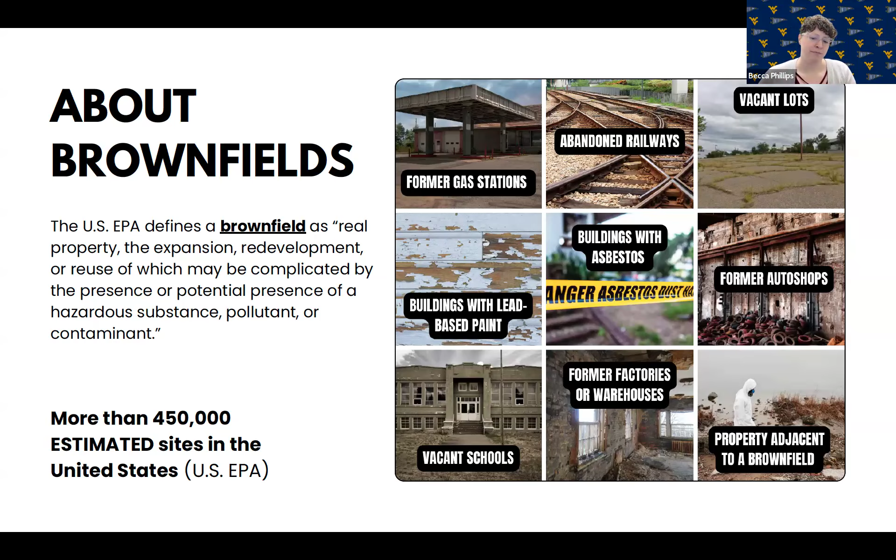Before getting into that, just a quick refresher on what a brownfield actually is. There's a formal definition by the EPA, but basically it's any property that might be contaminated based on previous use. Some common examples are things like former gas stations, abandoned railways, anything that has asbestos or lead-based paint. These aren't so contaminated that it'd be impossible to clean them up and reuse them, but they definitely do need to be looked at and made sure that's been addressed so they don't pose a public health issue.

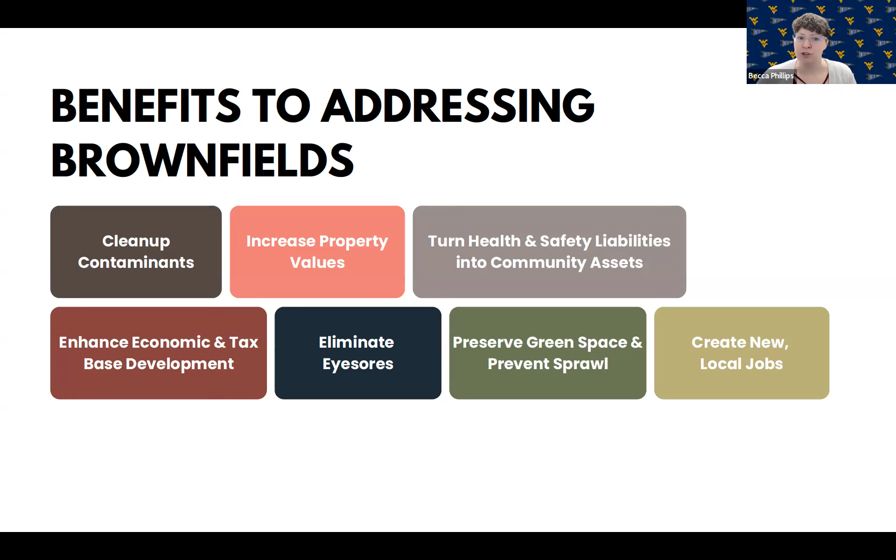When we're thinking about river towns, something important to be aware of, especially in this area, is the earlier history when industrialization was starting to take place, and a lot of those sites did occur on the riverfront for a few different reasons. It's largely economical and related to infrastructure, but it was an easy way to transport supplies, especially some of those heavier supplies before the railroads were installed.

Also, being close to the water was helpful for manufacturing and even for sourcing some of that power, like for steam engines and whatnot. And then, of course, historically, that was a great way to just conveniently dispose of your waste and just toss it in the river, which we know now is not a good practice.

So over the years, some of these sites have become abandoned and vacant as the factories have closed, and not only being an eyesore, they were also underutilized spaces and potentially public health hazards because there's a safety hazard and contaminants that can affect public health.

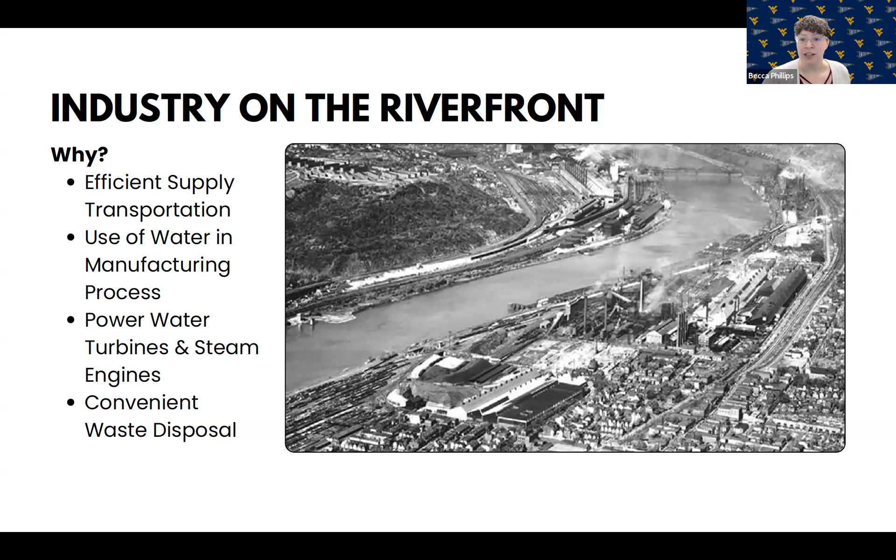And so a lot of what's happening now is some communities are starting to get these sites redeveloped, and a lot of those reuse options more recently are trending towards outdoor recreation and getting into the tourism aspect of things. This has been this gross industrial thing - what can we make it that really takes advantage of the beautiful river, getting some of that area cleaned up so that we can actually enjoy it for us as a community, and not just looking at it as a way to make money.

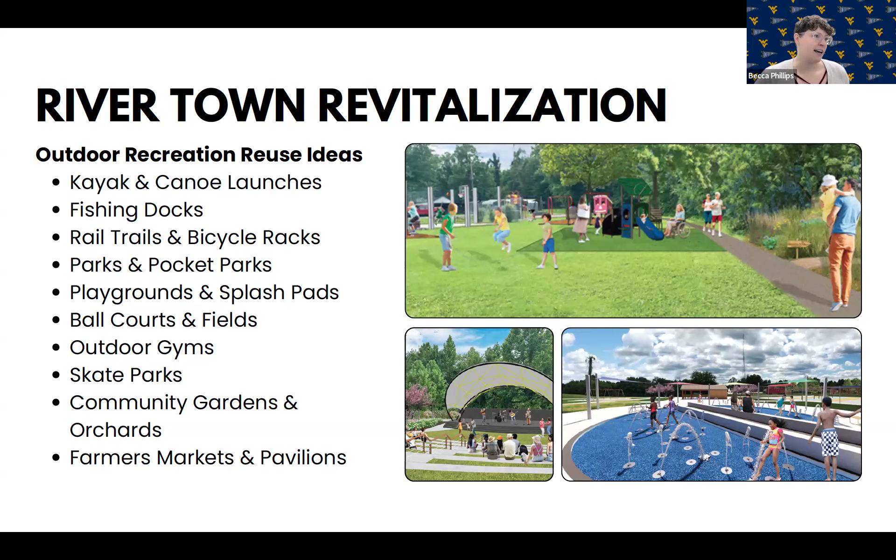Speaking of some recreational reuse ideas, there are all kinds of different ways that, depending on how the site was used in the past and where the contamination is, it can be remediated and put to a different use. A lot of fun different options here that I'm not going to list out for you.

What I am going to do is go through two different examples of some things that have taken place in West Virginia that the Brownfields Assistance Center here in the Water Research Institute has actually been able to help out with and have a hand in.

So let's get into the Morgantown Quality Glass Plant. This site is located on the Van Voorhis section of Mon County, bordering the Caperton Rail Trail. The site was about 3 acres, and at the time that we started getting involved in the early 2000s, it had 5 abandoned building structures that were full of some different hazardous things and waste materials.

There's like yucky bucket there, which is actually what the file picture is called.

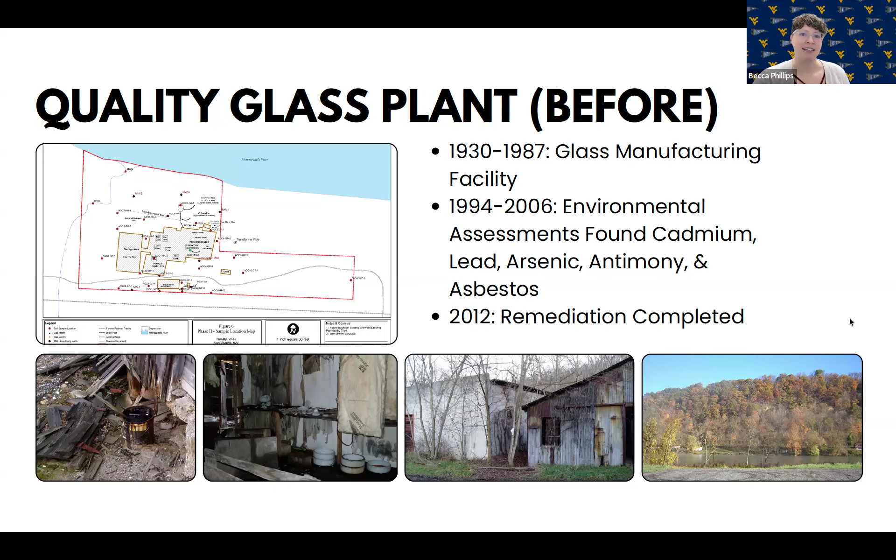All right. So now we're going to move on to the Fairmont Box Factory. And this one started as a glass melt shop and recycling facility, which then continued to just be a cardboard box manufacturing facility. And a lot of assessments happened over the years because the community could see this as an eyesore. It's also right by the river. So it's like, this is a great location. Can we please get this dilapidated building addressed so that we can use it for something else?

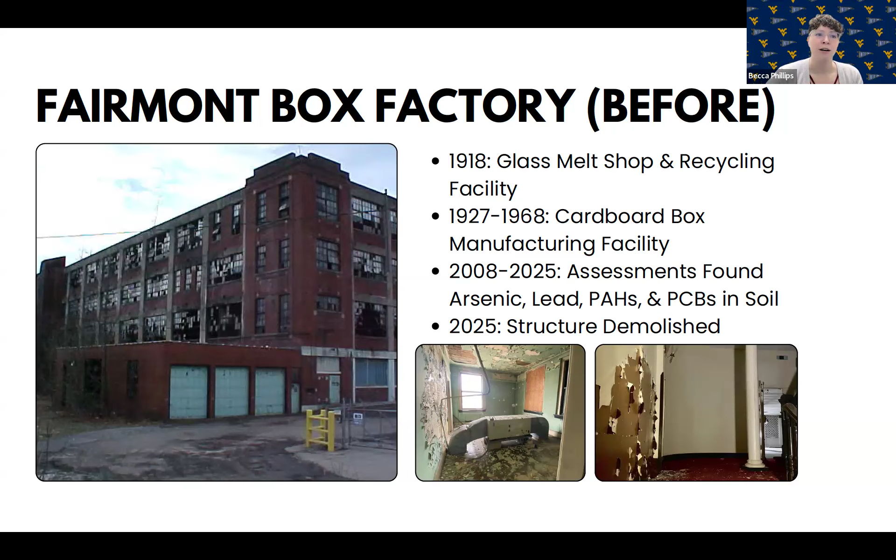And, excuse me, the city has worked with the community over the years to get input and feedback on what these sites should become. And it's really interesting to look back historically and see how some of that has changed. And the most recent plans are to really turn this into more recreational use for the community, which is great for public health and also helps with tourism too.

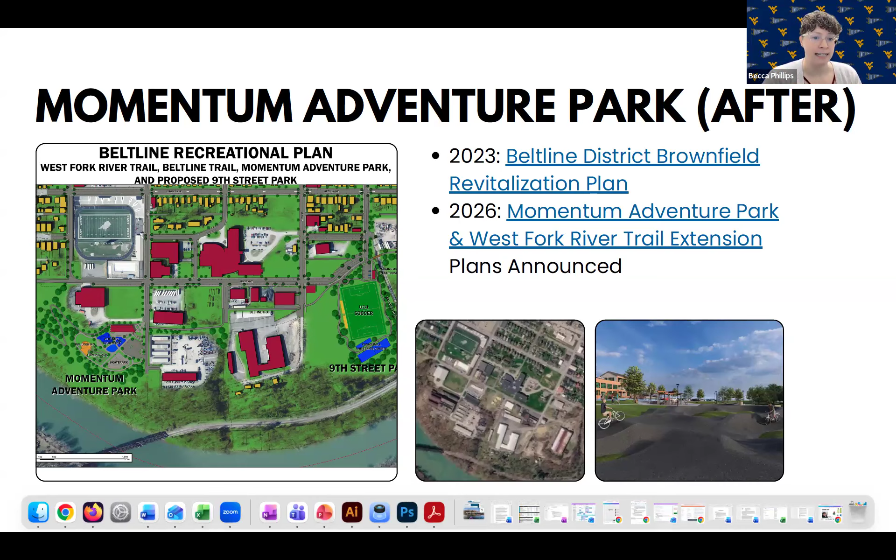So some of the services that we help provide for the area in general include some mini grants that helped with planning and visioning and securing additional funding. We also assisted with Fairmont applying for 3 different assessment grants, and then we helped with community engagement in general.

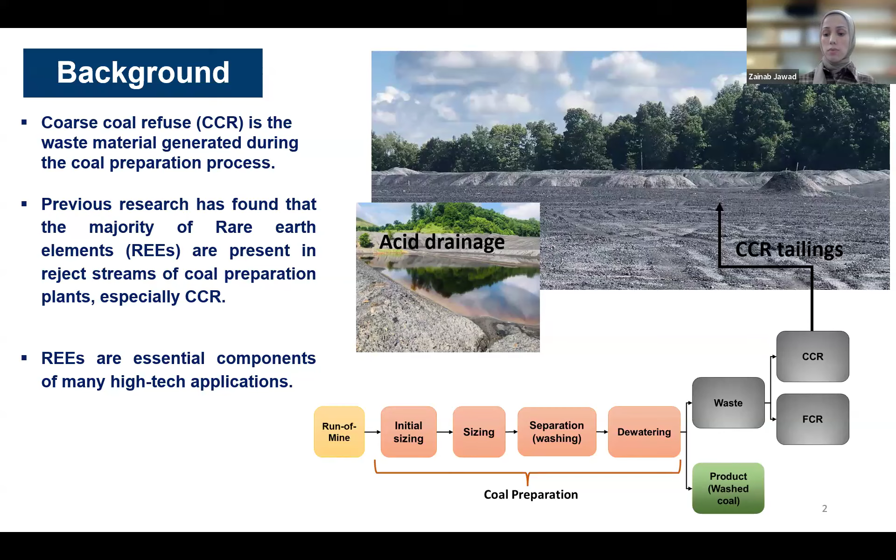Those materials are usually dumped or stacked as piles in open areas within the mine. And once exposed to weathering conditions such as oxygen and water through rain, its pyritic shale oxidizes and it generates acid drainage. So the hypothesis this project was built on is that the process of pyrite oxidation could be quickened and the REE extraction from the coarse coal refuse could be accelerated through the recirculation of the acid drainage. Our main goal was to evaluate heap leaching at bench scale or lab scale as a mechanism to extract the rare earth elements from the coarse coal refuse.

I mentioned heap leaching a couple of times, so I want to explain the meaning of heap leaching. When we say heap leach pad construction, we mean the process of building a heap or a pile of the ore of interest, and in our case it was the coarse coal refuse. It's usually built on an impermeable liner for environmental containment, and then a leaching solution is applied to the top of the heap, where the element of interest is selectively removed. So we wanted to mimic this process in the lab.

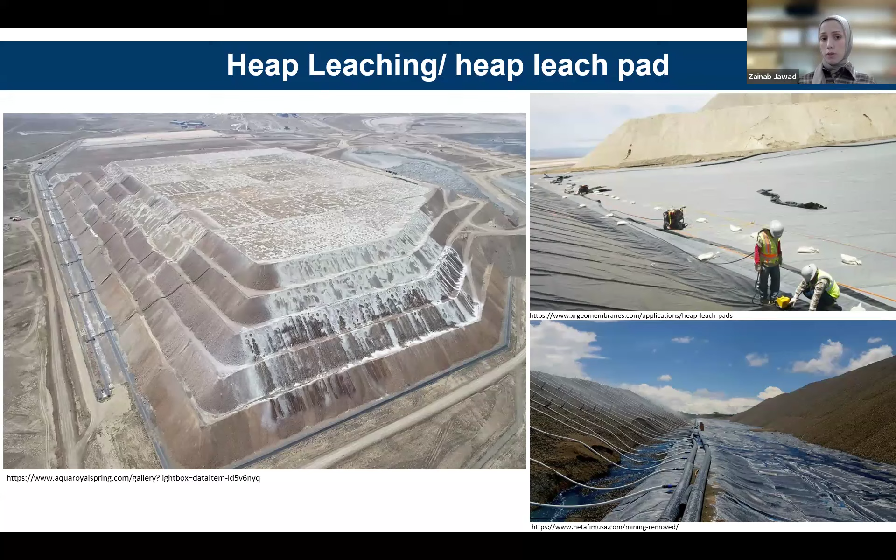So one of our objectives was to determine which type of coal refuse would give us the best results. So we collected three types of coal refuse. The first two types were from the Monongalia County mine, known as the Blacksville Number 2 coal mine. The first one, I will be referring to as weathered coarse coal refuse, and that was about 5 years old at the time of collection. So that means it has been exposed to weathering conditions for 5 years.

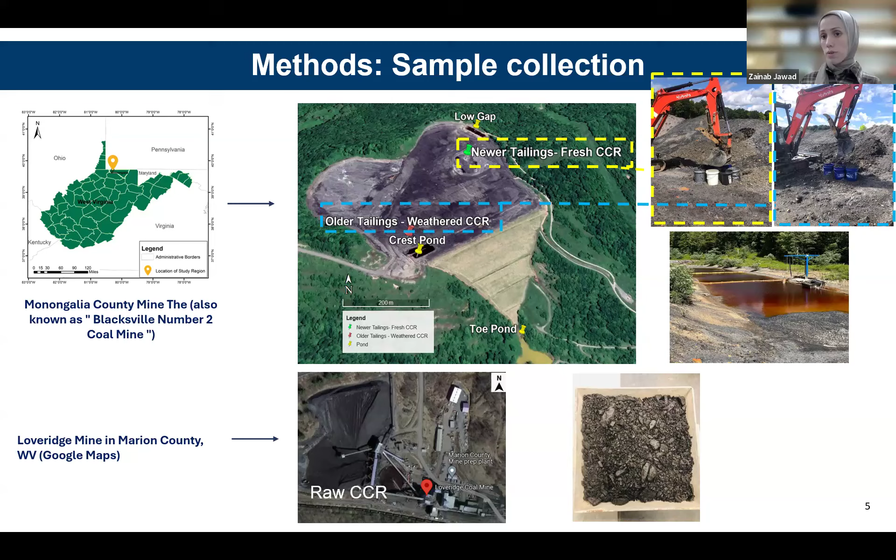The other type, from the opposite side of the impoundment area, I'll be referring to as fresh, and that was about 2 years old at the time of collection. We also collected acid drainage, or acid mine drainage, from the Crest Pond available at the site as well, and this pond was chosen based on its low pH and high REE concentrations.

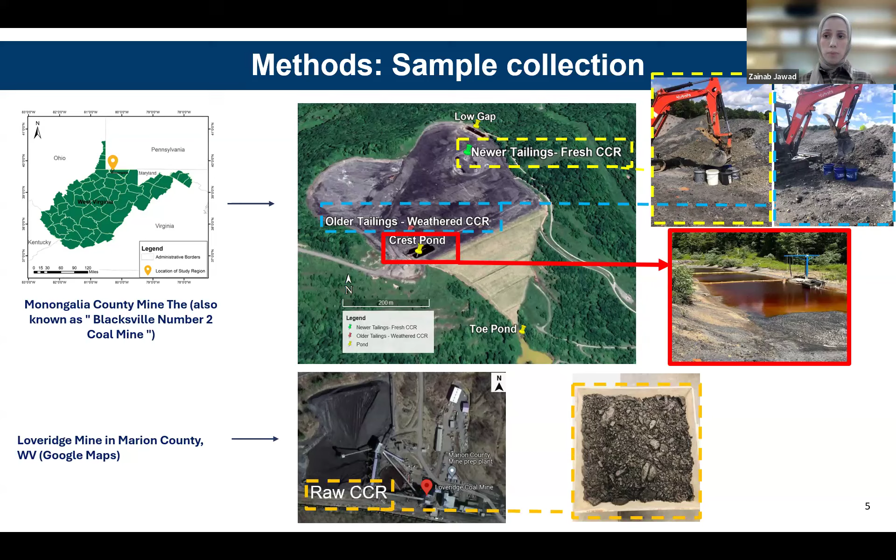We also collected a third type of coarse coal refuse that was from the Loveridge mine in Marion County, West Virginia, and that was collected right from their prep plants, and that has never been exposed to any weathering condition, and that's why we gave it the name raw.

So as I said before, we are trying to mimic the process of heap leaching, but in the lab. So the first test that we chose to do that was the column leaching test. So we did 2 rounds of column leaching testing. The first round, we used the weathered and the fresh refuse. We filled 6 columns, 3 for each type. And then we used 3 leaching solutions. The first one was the acid mine drainage. The second one, acid mine drainage with added hydrogen peroxide as an additional oxidizer. And the third one was the DI water.

We did the testing for 6 weeks. During the first 3 weeks, we did one leaching cycle per week, and then we collected a sample by the end of the cycle, and then we sent it to the lab for testing. We stopped for 1 week for data processing, and then we decided to go with multiple leaching cycles after that. So we did 2 leaching cycles during weeks 5 and 6, and then by the end of those cycles, we collected a sample and sent it for testing.

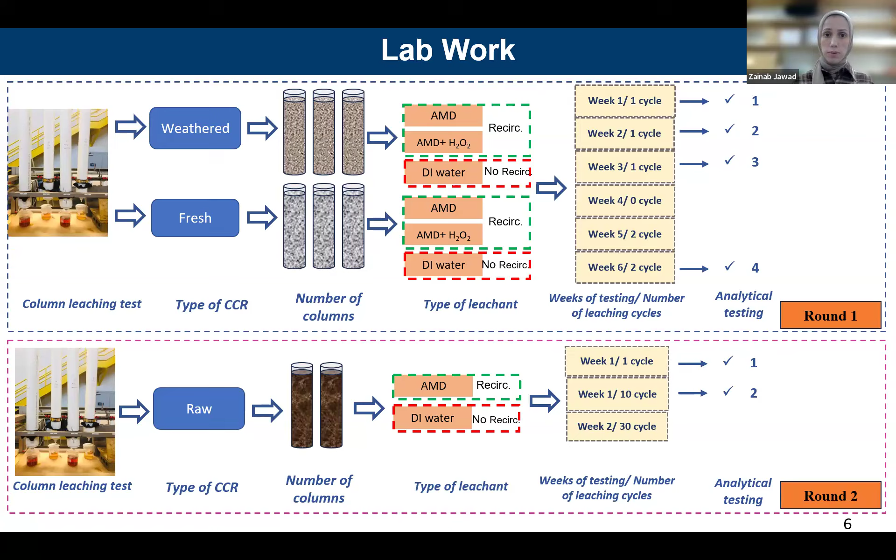During the second round, we used the raw refuse, and we modified this round based on the results of the first round, and we used the acid mine drainage and DI water as leaching solutions. The idea here was to leach as frequently as possible, so that once the discharge from one cycle stopped, we start the following cycle. But then we decided to terminate this test upon receiving the results of the 10th leaching cycle, and we will know why in the results in a little bit. So this is the setup of the column leaching test that we did in the lab.

So for our key findings, the first important finding was that a combination of weathered coarse coal refuse with AMD as the leaching solution gave the best results. Weathered refuse had the highest leaching potential when we compare it to the other two types. And there were 3 reasons behind this finding. The first reason is that pyrite oxidation has already taken place within the weathered refuse, and REE compounds were made readily available at the surface of the refuse. And that was evident through the results of the paste pH.

We know that a value of less than 6.5 means that the material under testing has already gone through the weathering process and has already generated acidic sulfate salts. And we can see those numbers for the weathered and the fresh were less than 6.5. When we compare that to the raw, we can see that it has a high number, and the results were insignificant for the raw refuse, almost 0 for total REEs, and that is indicated by the orange circles in the figure.

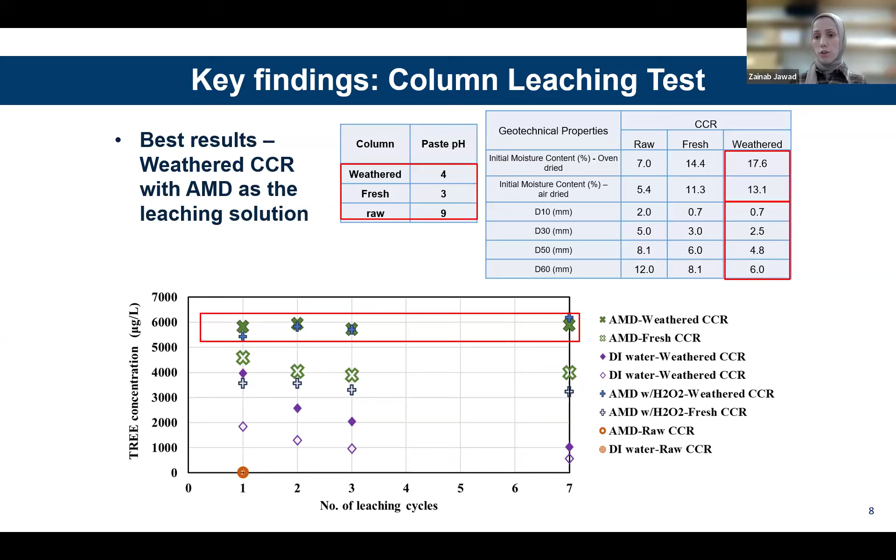The second reason was the high moisture content within the weathered refuse, and we know that water is very important for oxidation. The third reason is the small particle size range of the weathered refuse, and that's again due to weathering. So as the particle size decreases, the surface area available for oxidation becomes bigger. So I'll continue my results with the column that gave us the best results, which is the one filled with weathered refuse and AMD as the leaching solution.

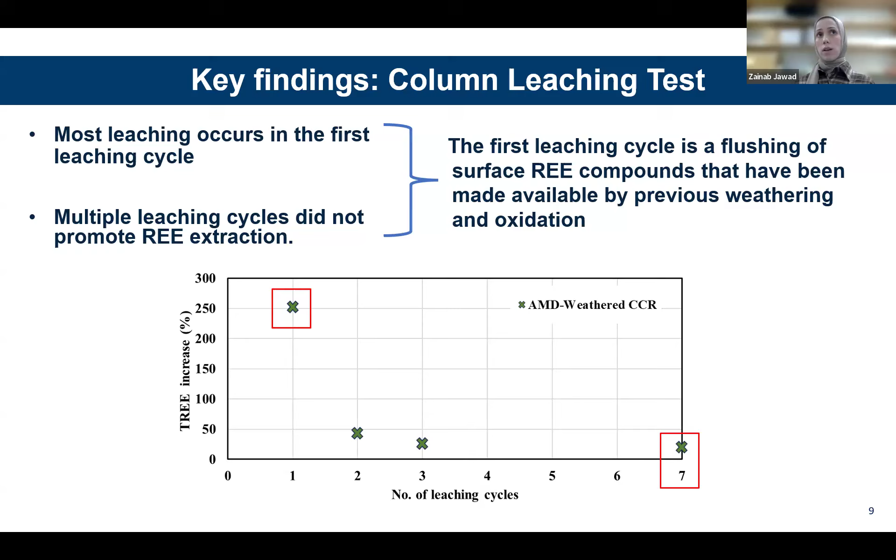Also, another very important key finding is that most of the leaching occurred within the first leaching cycle. The multiple leaching cycles that we did during weeks 5 and 6 did not promote REE extraction. And that, again, as I said before, is because prior weathering and oxidation has made the REE compounds available at the surface. So the first cycle was enough to flush most of the REEs out, so we didn't see any significant increase after that. Other results: the highest percentage of total REE leached from solid was less than 2%. And total major metals, for example iron and aluminum, followed the same trends that we've seen with the total REEs.

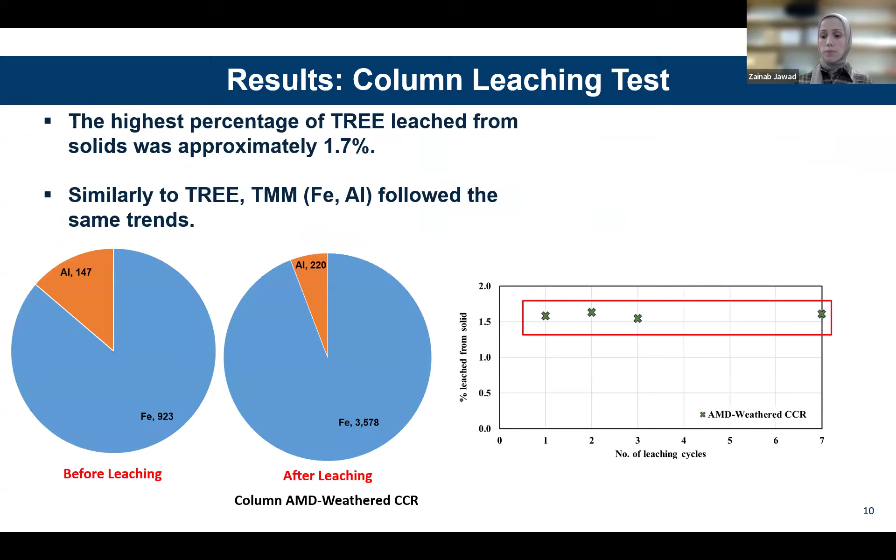Then we decided to scale the size of the testing. So we went from columns to drums, size 55-gallon drums. And that was done to eliminate any possibilities of preferential pathways that the leaching solution might follow due to the small size of the column. So we used the weathered refuse with AMD as the leaching solution based on the results of the column testing.

And then we did 2 phases of leaching testing. The purpose of the first phase was just to mimic the plan that we followed with the column testing during the first 3 weeks to compare the results. And then we had an extended drying period of 4 months. Once we started phase 2, we started with 1 leaching cycle for each drum. And then we modified the schedule for both of them.

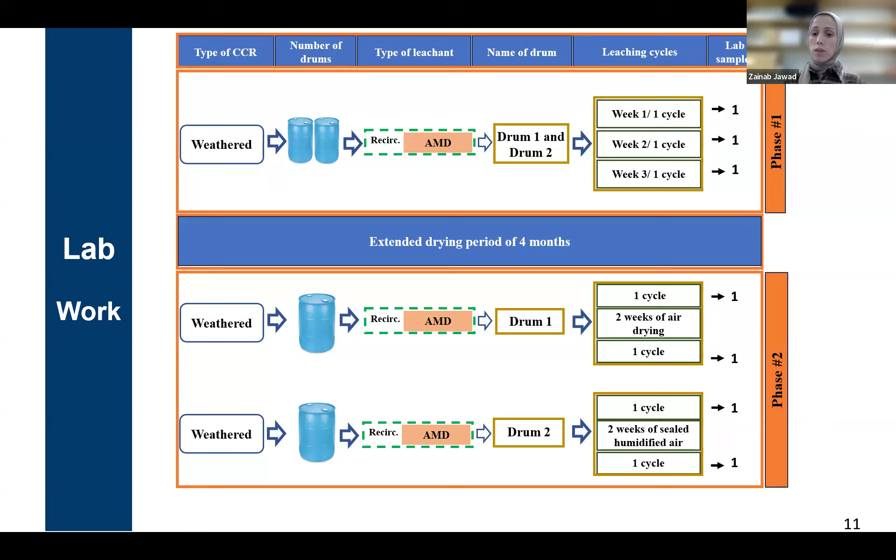With the first one, we followed a shorter drying period of 2 weeks for the first drum. For the second one, we applied humidified air as an engineering control. We applied it for 6 hours. That was enough to fill the voids within the coarse coal refuse. And then we sealed the whole drum. By the end of the 2 weeks, we did 1 leaching cycle for each drum.

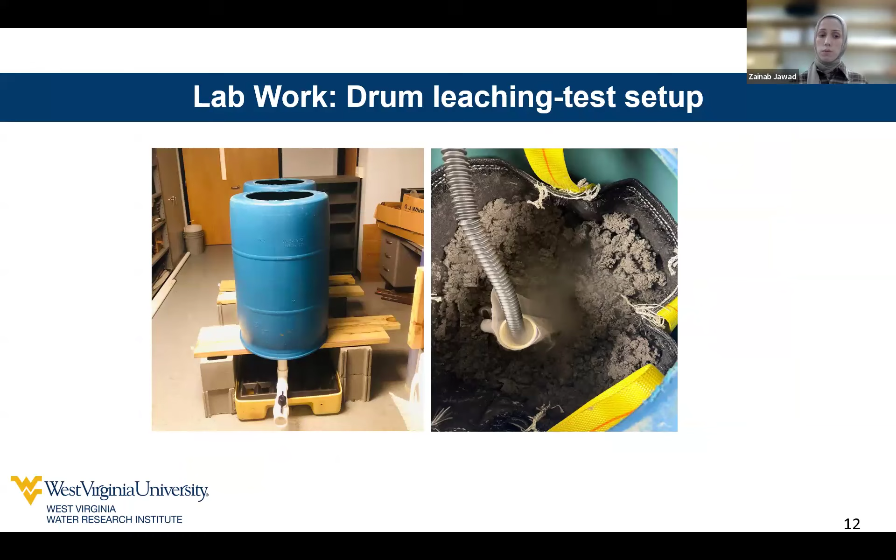This is the setup of the drum leaching test, and this is how we applied the humidified air, and then we sealed the second drum. So when it comes to the results, this is the result of the first phase. As I said, that was just to compare to the results from the column testing. And as we can see here, the results of the drum testing confirmed our results from the column testing, with the first leaching cycle extracting most of the REs, and then limited or not significant increase after that.

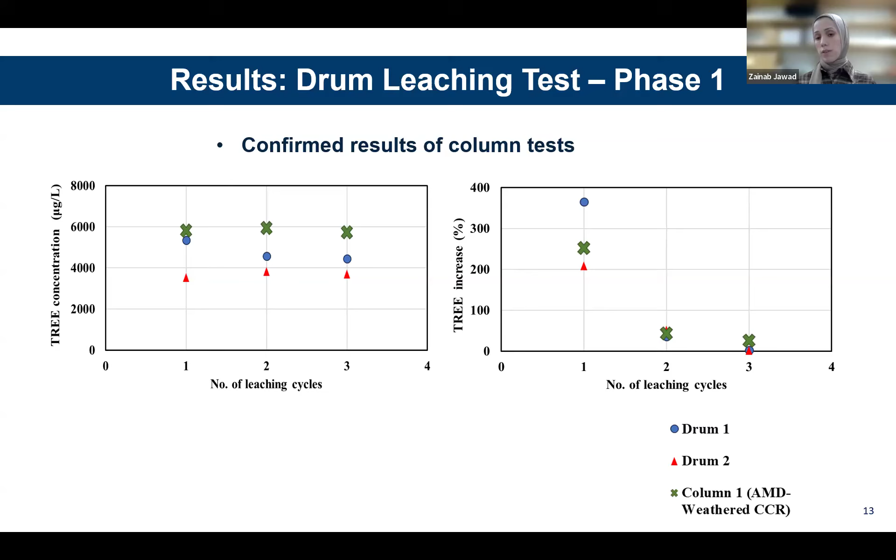Here I'm showing the results of the first phase and the second. I talked about the first phase, and now we can see that the influence of an extended drying period of 4 months was observed through the first leaching cycle of phase 2. That cycle doubled the amount of total REs within the leachate. The percentage increase of the total REs was a little bit more than 100% for both drums.

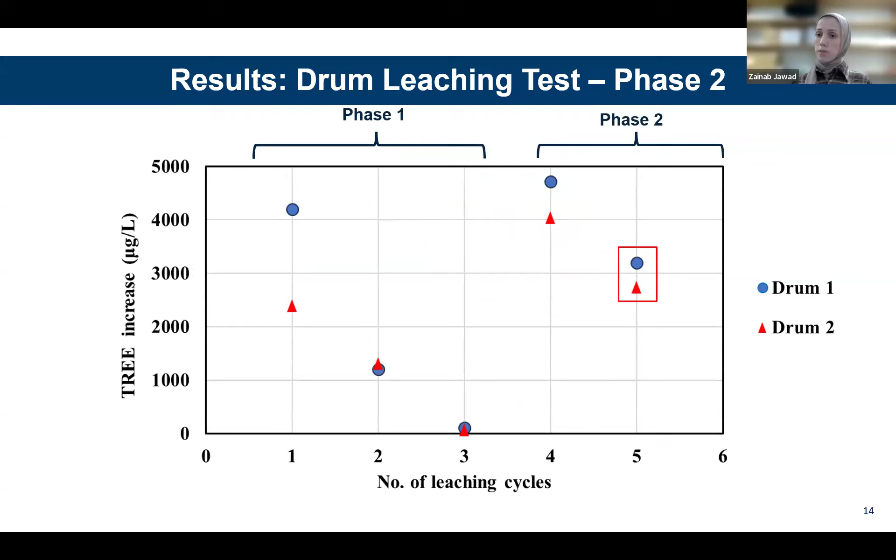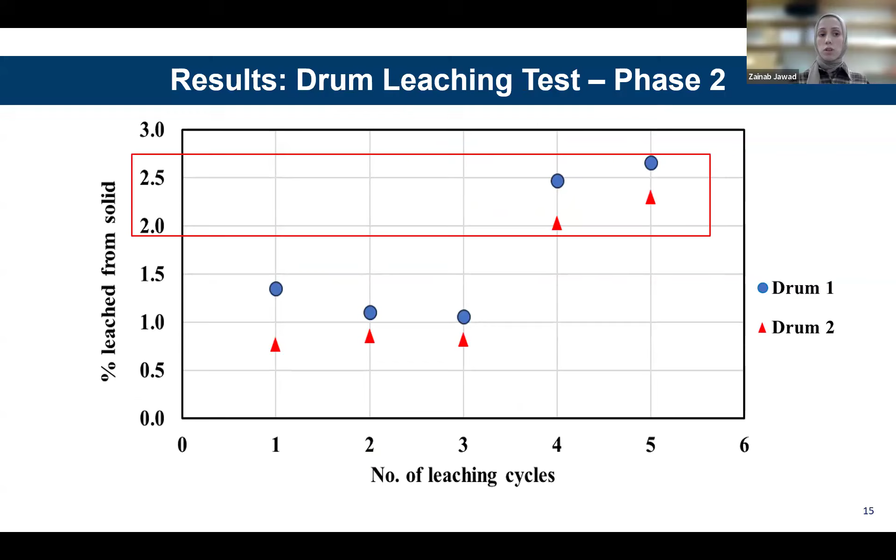When we compare the first cycle with the second, we've seen again a limited increase with the second, which was after 2 weeks of drying for the first one, and applying humidified air for the second one. That was similar to trends seen with later cycles in phase 1. The results of phase 2 showed that the percentage leached from solid was increased to between 2 to 2.5%.

And we found out that an extended drying period of 4 months, for now at least, can allow for additional pyrite oxidation, and allows for the RE compounds to accumulate at the surface of the solid refuse. So our next step is to evaluate a shorter, midterm drying period of 2 months, just to determine our optimum drying period that would give us the best results.

And before I end this, I just wanted to acknowledge the financial support that we received for this project from the Department of Interior Office of Surface Mining, Reclamation, and Enforcement, and the in-kind support I received from the WRI folks and the American Consolidated Natural Resources, ACNR, during field visits and lab testing.

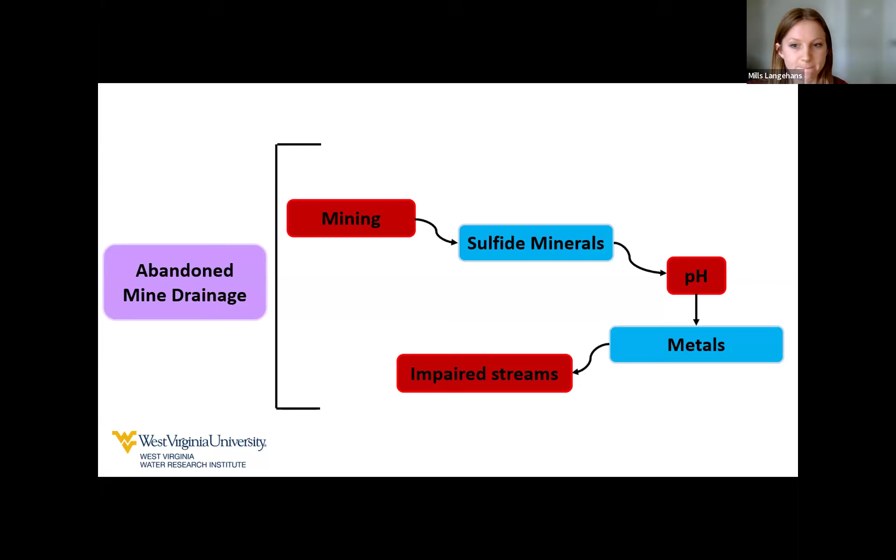They'll change from dissolved metals to particulates depending on the pH, but in fast flowing streams, those particulates are still taken away to wherever the streams are going to. So it's a little bit of a problem.

So moving on back to Lambert Run. In 2003, Guardians of the West Fork developed a watershed based plan for this. And since then, WRI and Guardians of the West Fork, in conjunction with agencies like the West Virginia DEP, have worked on various passive treatment systems in this area through Section 319 grant funding.

So moving on to Lambert 4. This site recently was constructed in September '25, but before that, it had a pH of 7.64, which again is a relatively high pH. Usually when I see water chemistry like that, I think, oh, it's not that bad. It still can be.

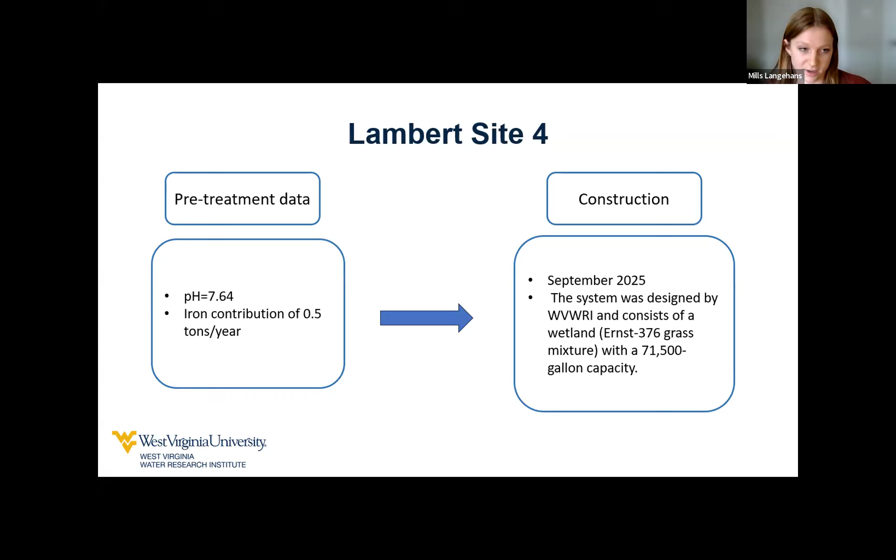So, for instance, here, this stream with pH of 7.64, or the source, was still contributing 0.5 tons per year of iron into Lambert Run, which is why we went in and constructed this wetland, which holds 71,500 gallons. I have a couple pictures showing what that looks like up here.

What it looks like now, all of the grass has died down, but what's really great is it's still showing a reduction in some of these impairment parameters. So far we only have 10 total samples, which is about 4 months of data for us, which isn't a lot. But going off of that, this is showing a 70% reduction in total iron.

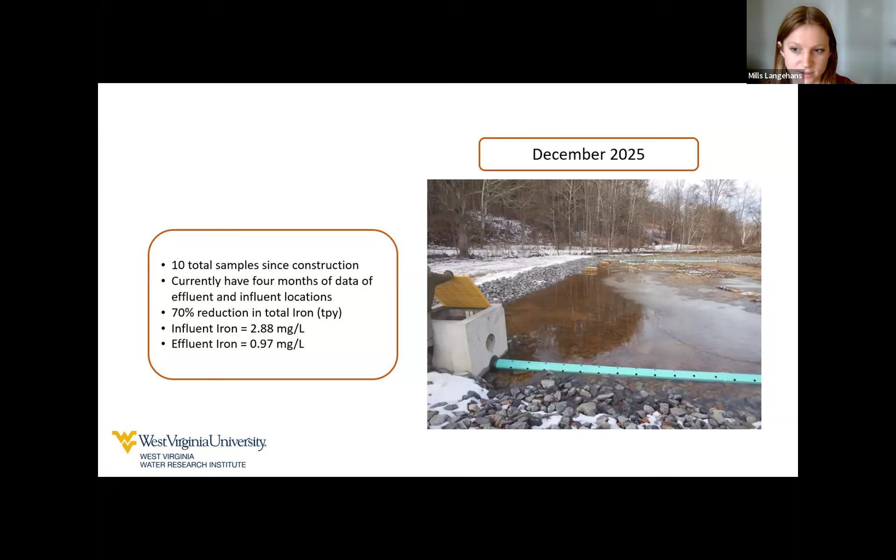Influent would be about 2.88 milligrams per liter, and effluent is below 1, which is great, especially since half of this data has been in winter months where there is less wetland grass in that treatment system.

So moving on to Lambert Site 7. This is a very large system. Pre-treatment data, we have pH of 6.6, again relatively high from what I'm used to seeing, but we do see that it was still contributing 0.25 tons per year of aluminum and 45 tons per year of iron. This is by far the largest source in the watershed.

Commonly this exceeds 1,000 gallons per minute discharge. So back in September of 2015, a treatment system was constructed that consisted of 5 aerobic wetland cells. Upcoming, I'll have an aerial picture to show you of what that looks like. After that was constructed, we see pH comes up a little bit more, closer to neutral. This showed actually a 70% iron reduction and a slight aluminum reduction. But we found that it was still discharging over 5 tons per year of iron to Lambert Run. The goal is 0.

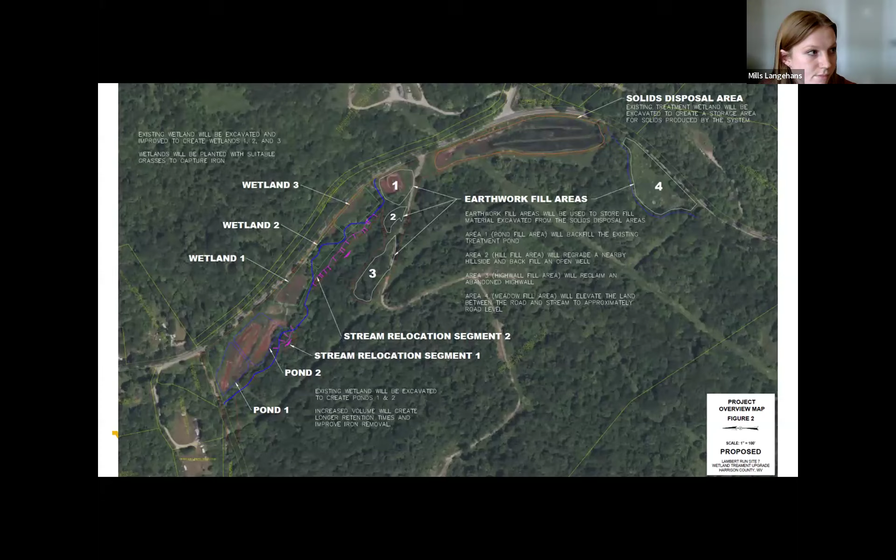Acknowledgements: West Virginia DEP and Guardians of the West Fork have been a huge part of this, as well as WVWRI. And then, of course, landowner support is huge for this. Most of this would not be possible without that.